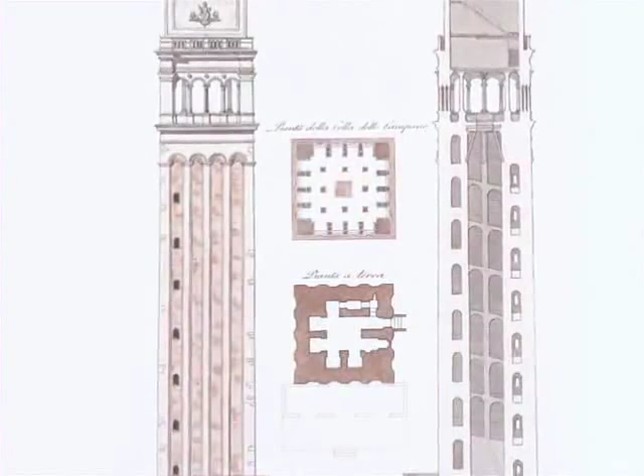And while the MetLife Tower's form was modeled on the Campanile in San Marco, the two structures couldn't be more different. The Campanile's impressive height, 323 feet, was achieved through the use of massive brick walls, over 12 feet thick. So thick, in fact, that they leave just a 12-foot square area of usable space inside the tower.

The MetLife Tower, on the other hand, uses an innovative steel frame to achieve its record-breaking height of 700 feet while providing over 200,000 square feet of interior commercial floor space. The exterior walls of the MetLife Tower are just a thin limestone veneer.

The difference between the Campanile of San Marco and the MetLife Tower can be summarized in one word: steel. The unique properties of steel enabled the MetLife Tower's great height and its efficient use of interior space. This is a typical example of the influence of materials on the form, function, and structure of a great building.

In many respects, steel is an ideal engineering material. And so I'm starting today's lecture with this particular material because it serves very nicely as a benchmark for comparison with all of the other materials that we'll be talking about later in the lecture.

And in comparison with those materials, iron, concrete, wood, stone, and brick, steel really is superior in terms of all three of those principal mechanical properties: strength, ductility, and stiffness that I talked about last lecture. Let's use the stress-strain curve for a typical structural steel to review these properties.

The most important mechanical property of any material is strength. It's the largest stress a material can withstand without failing. To be precise, the overall height of the stress-strain curve, as shown here, is called the ultimate strength. For this particular structural steel, the ultimate strength is about 65,000 pounds per square inch, significantly higher than the other materials we'll be comparing steel with shortly.

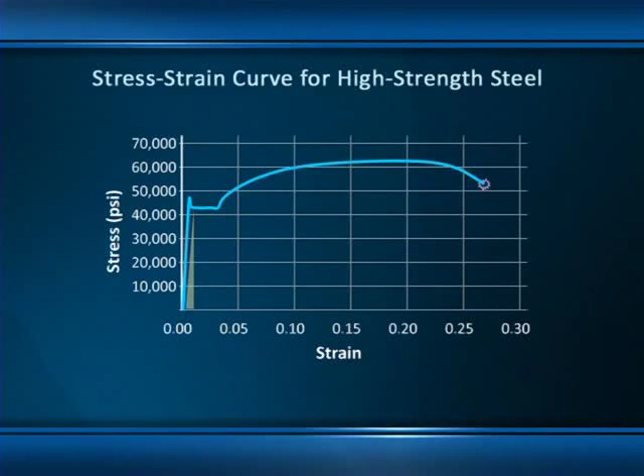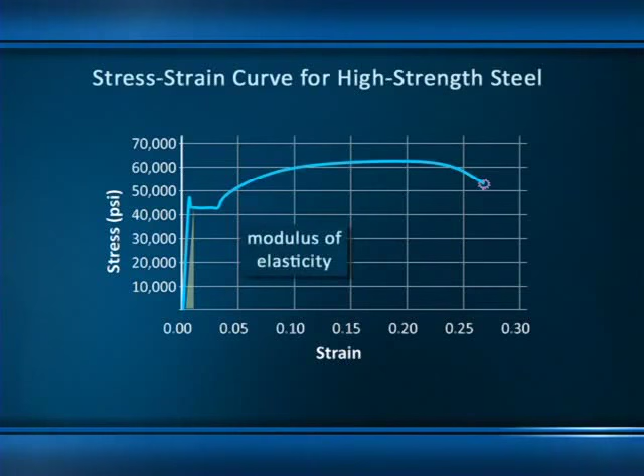Stiffness, the third of our important material properties, is the material's capacity to resist elastic deformation, represented by the slope of the elastic portion of the stress-strain curve. The slope of a line is defined mathematically as the rise divided by the run. When we calculate this number for a stress-strain curve, we get an important material property called the modulus of elasticity. A stiff material has a high modulus of elasticity. We'll see some really important applications of this property when we discuss columns in Lecture 5.

Stiffness is also a good thing. Stiffer materials deform less under a given load, and so they're particularly useful for structural applications where deformation is a concern. Skyscrapers, like the MetLife Tower, for example, are particularly susceptible to lateral sway caused by wind loads.

Steel provides the stiffness necessary to control this sort of deformation. While steel exhibits the ideal qualities of strength, ductility, and stiffness, it's not an ideal material in all respects. In fact, steel has several important major limitations as a structural material.

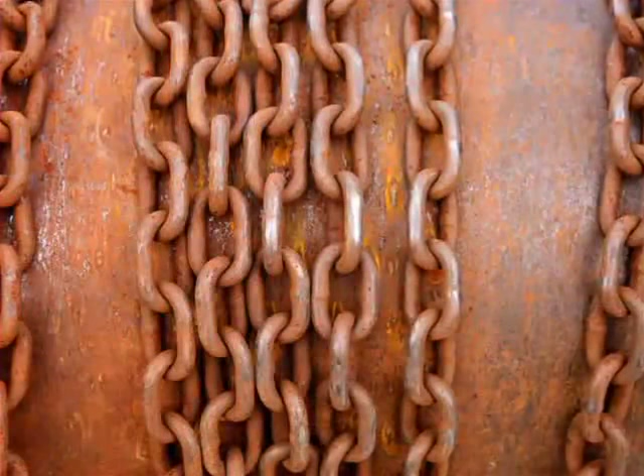First, it's susceptible to corrosion, the long-term deterioration caused by the chemical reaction between iron and oxygen. You probably know this phenomenon as rusting. It also has very poor fire resistance. By the time steel reaches 900 degrees Fahrenheit, it will have lost about 30% of its tensile strength. By 1400 degrees, it will have lost nearly 90% of its strength.

That's steel. Now let's examine some of these other common materials, wood, masonry, concrete, and iron, and see how they've been used in great structures through the ages in a manner consistent with their material properties. First, wood. Wood has been used extensively throughout history, including prehistoric times, because it's available in most regions of the world and because it can be worked quite easily with simple tools.

Wood is the lightest of the common structural materials, and we can see that very evidently with a very simple demonstration. These two small structural members are exactly the same size. Their dimensions are identical, their lengths are identical, their widths and their thicknesses are identical. So what's their difference in weight? Well, we know the steel is heavier, but how much heavier do you think it is? Twice as heavy? 3 times as heavy?

Let's see. When we place this steel bar on our scale, we see that it reads about 0.6 pounds. Now let's try the wood. When I place the wood member, which is identical in size, on the same scale, look carefully, because what you'll see is the scale hardly registers any weight whatsoever. It's less than 1/10 of a pound, and therefore about 1/10 of the density of steel.

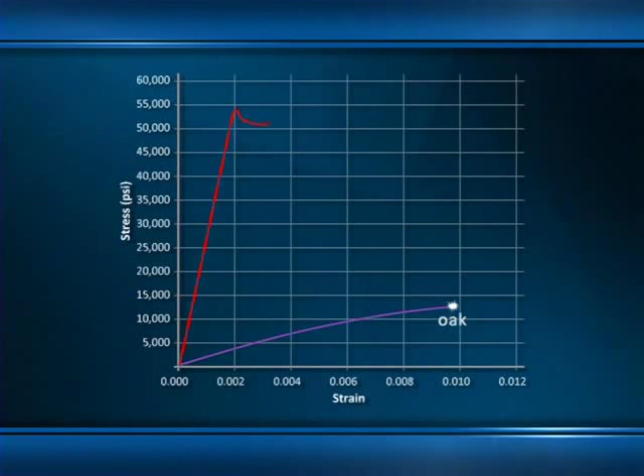Now, if we compare typical stress-strain curves for wood and steel, we see that a typical type of wood, oak, is only about 1/4 the strength of structural steel. And since it's only 1/10 the weight of steel, the strength-to-weight ratio, which is a very good measure of structural efficiency, is actually a lot higher than that of steel. And that certainly explains the fact that wood, while we think of it as a sort of a primitive structural material, is actually still very commonly used today.

Wood is also much less stiff than steel, as you can see from the shallower slope of oak's stress-strain curve. We can also see it in a very simple demonstration using those same two elements. If I now use each of these two elements as a beam, I can place them spanning between the two bricks. And if I place a load on each of these beams at midspan, watch carefully and you'll see that under the action of this load, the beam bends about 1/10 of an inch. That's a pretty good reflection of the stiffness of steel, its capacity for resisting elastic deformation.

Now, if I do exactly the same test on the wooden member, which again has identical dimensions, we find that those flexural deformations, the bending deformations, are in excess of 2 inches, more than 20 times larger than the deformations that we saw in steel. So clearly there is a vast difference between the stiffness of these two materials as well.

Now, as we're looking at these stress-strain curves, notice that for clarity, I've cut off most of the right-hand end of the steel stress-strain curve. Recall that the failure strain for steel is about 0.25, 25%. So if I ran the horizontal axis of this graph all the way out to 0.25, the curve for oak would be squashed so tightly against the left-hand side that you wouldn't even be able to see it. This tells us that wood is a relatively brittle material. Its failure strain is quite small in comparison. Steel is about 25 times more ductile.

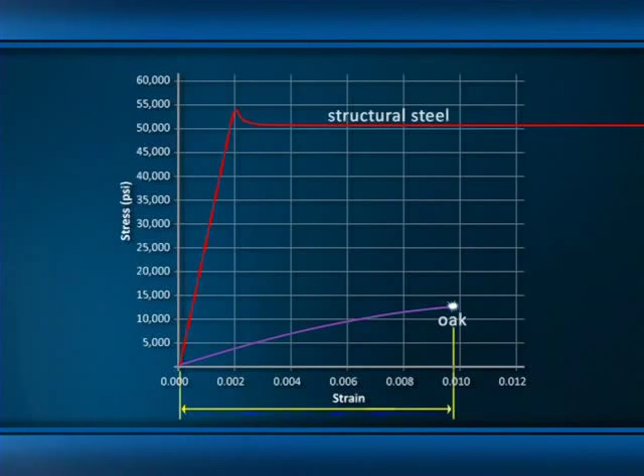Like steel, wood has roughly equal strengths in tension and compression, a very desirable quality. And this, in fact, was unique among the materials available to ancient and medieval builders. Stone and brick masonry, as well as concrete, all have very low strength in tension, even though they have relatively high strength in compression. Recall that beams and trusses both require materials capable of carrying both tension and compression. And so virtually all of the long span beams and trusses that we know of from the ancient and medieval worlds were made of wood.

Here are some fine examples of early medieval wooden roof trusses spanning the nave of this beautiful little Romanesque basilica in Florence, Italy, San Miniato al Monte. We'll be looking more closely at this incredible structure in a later lecture.

Another important attribute of wood is its natural beauty, which accounts for its continued use in modern buildings like St. Maximilian Kolbe Church in Westlake, California, shown here. Wood also has several disadvantages as an engineering material. In addition to its brittleness and low stiffness, which we've already seen, wood is also subject to rot.

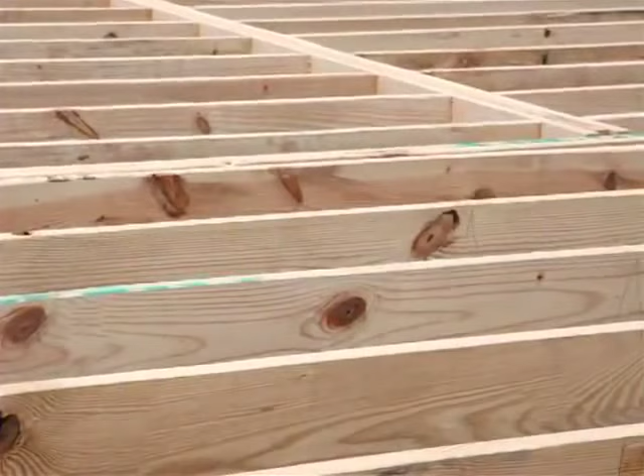It's highly flammable, and because it's a natural material, its mechanical properties are much more variable than, say, iron or steel. We've all seen knot holes in wood, and a knot hole represents a point of weakness. That's a significant challenge for structural designers trying to plan for the use of material in engineered systems.

And finally, it's important to remember that wood is an exhaustible natural resource. Back in the ancient world, timber was in very high demand for shipbuilding and construction and heating and charcoal, which was used for smelting metals. As a result, most of Greece, for example, had been almost completely deforested by the 5th century BC. This was an environmental tragedy, and it really persists even to this day.

But it did produce one interesting and positive outcome. The shortage of timber almost certainly contributed to the increased use of masonry construction in ancient Greece, and therefore is part of the reason why we have these more enduring architectural features and architectural wonders that have come down to us from Greece's golden age.

Okay, let's move on to the next type of engineering material, stone and brick masonry. It's another family of construction materials dating from prehistoric times and still in wide use today. Back in the ancient world, masonry construction was very heavily influenced by geography.

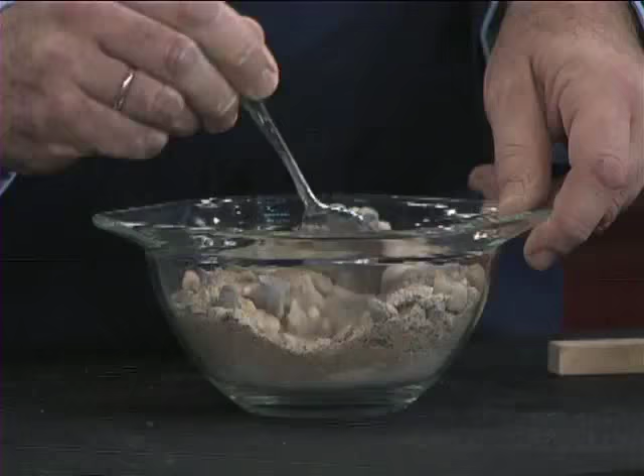And before I actually mix everything together, I need to first pre-mix the dry components so that they're well blended together. And this is really important because of the way concrete actually works as a structural material. I add water carefully to get just the right amount. When we add water to the mix, it blends with the cement, and it actually forms a paste. And that paste will ultimately harden as a result of a complex chemical reaction.

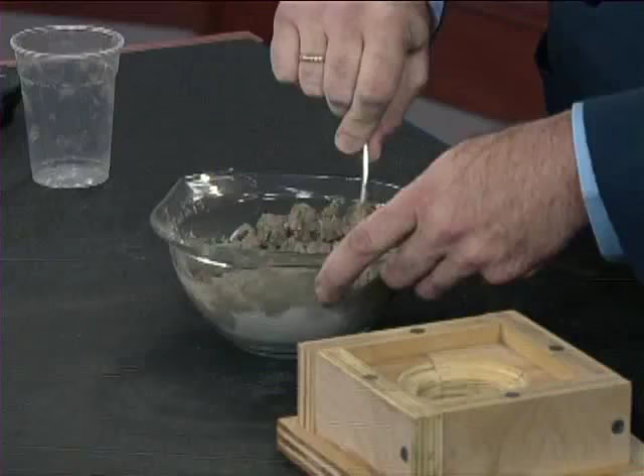What happens to the paste is that it fills in the spaces between the granular aggregate. Between the grains of sand and the pieces of gravel, there are very small open spaces, voids. The cement paste fills those voids, and as a result, gives concrete the capacity to harden into a very solid mass when it's completely cured. And that solid mass is what makes it so effective as a structural material. It really turns it into, effectively, a man-made stone.

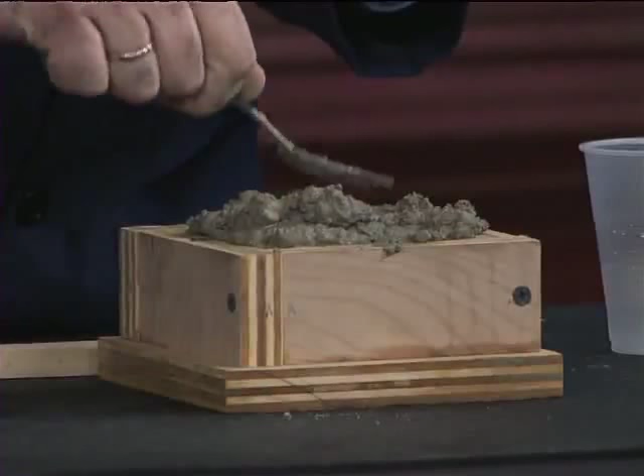Okay, so now we have our concrete mix in place. We're going to add it to a form, and this is the way modern concrete construction is normally done. A temporary form is prepared, which contains the concrete while it's still in liquid or semi-liquid form, and that set of forms then is responsible for creating the final form of the concrete structure. When we put the concrete into the mold or temporary formwork, I need to consolidate it.

And then once we're done with that process, I use what concrete constructors call a screed. That's just a piece of wood that allows me to strike off the excess material from the top of the mold and consolidate it so that we now have a nice flat surface of concrete on the top of our mold, and our concrete construction exercise is now complete.

Now, concrete sets up in a few hours, but it actually takes several weeks to reach its full strength. Fortunately, it would be strong enough so that next lecture, when we talk about columns, we'll be able to use this. And in fact, what will eventually emerge from these forms is a capital of Trajan's column. Stay tuned and see how it turns out.

In ancient Roman concrete, the cement was a mixture of lime and a volcanic ash called pozzolana, named after the village of Pozzuoli near Mount Vesuvius, where the material was first obtained. Pozzolana produced a very strong, durable concrete that was even capable of hardening underwater. The aggregates typically were rubble, stone, broken bricks, or pieces of clay tile.

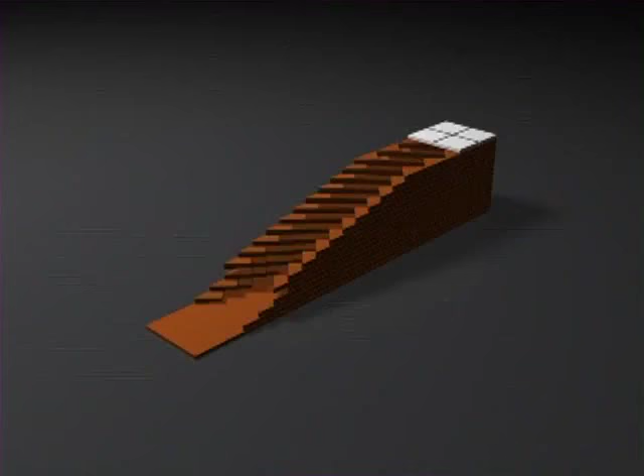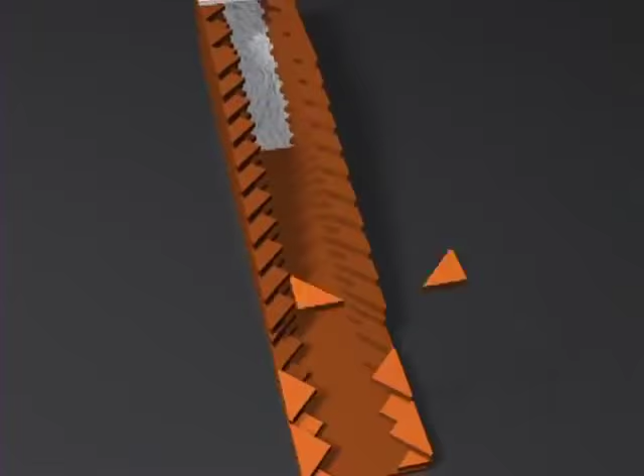But the Roman system, which was called opus latericium, is fundamentally different, and in some ways it's actually superior to modern methods. In opus latericium, which is illustrated here, bricks, often triangular in shape, were used to form the outer surfaces of the wall, and then the space between those bricks was filled with concrete, which actually provided the wall's structural strength. The brick facing eliminated the need for any temporary formwork, and then it gave the finished wall a much more pleasing finished appearance.

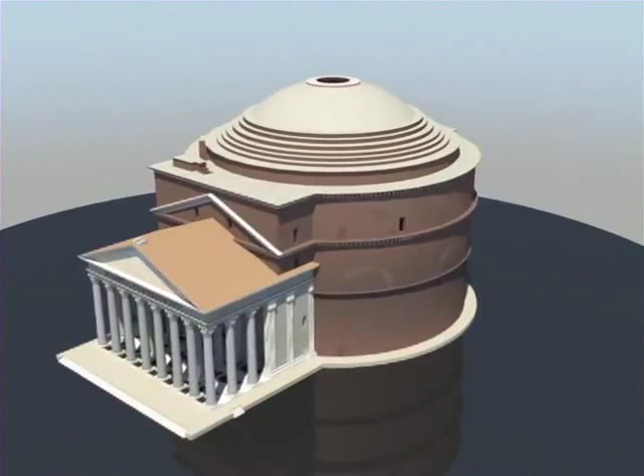By standardizing these sorts of building systems, the Romans were able to design and build an amazing variety of concrete structures all over the empire. The greatest of these was certainly the Pantheon, this incredible monument, not just to Roman engineering, but to Roman expertise in concrete construction. We'll be examining this extraordinary building in Lecture 13 in much more detail.

Modern concrete now uses something called Portland cement. It's a manufactured product that's chemically somewhat different from Roman pozzolana, but it works in essentially the same way. The first process for manufacturing modern cement was developed and patented in 1824 by a man named Joseph Aspdin, a British mason. Aspdin called his product Portland cement, not because it was made in Portland, but rather because the cured concrete resembled a popular type of natural building stone that was found on the Isle of Portland.

So when you buy a sack of Portland cement today at your local hardware store, you're actually experiencing a nearly 200-year-old marketing campaign that succeeded beyond Joseph Aspdin's wildest dreams.

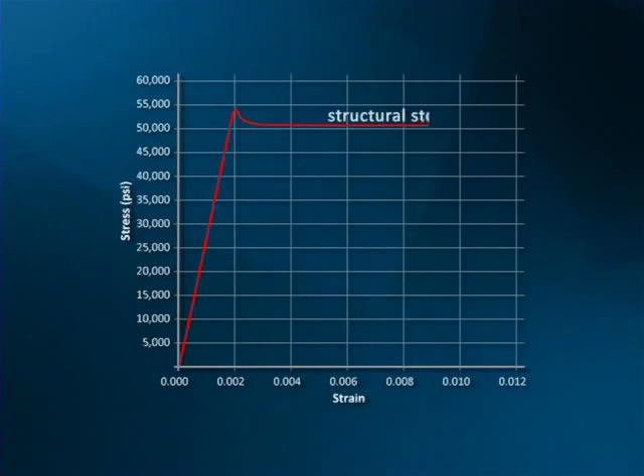Now let's explore the mechanical properties of concrete. Note that unlike the curves for steel and wood, the stress-strain curve for concrete is based on a compression test rather than a tension test. Concrete fails at such a low amount of load in tension, about 500 psi, that the tensile stress-strain curve for the material wouldn't even show up on this graph. It would be so low.

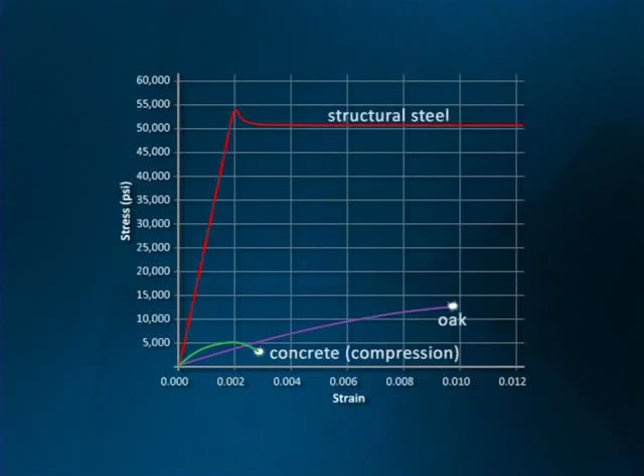But even in compression, concrete isn't nearly as strong as steel. In practice, however, because it's so inexpensive, we can generally get very high compressive strength in a member by simply using a much larger cross-sectional area than we would with steel. Concrete has very good fire resistance, and reasonably good weather resistance as well. But as you can see from the diagram, it's also quite brittle. Perhaps concrete's most important weakness is its poor tensile strength.

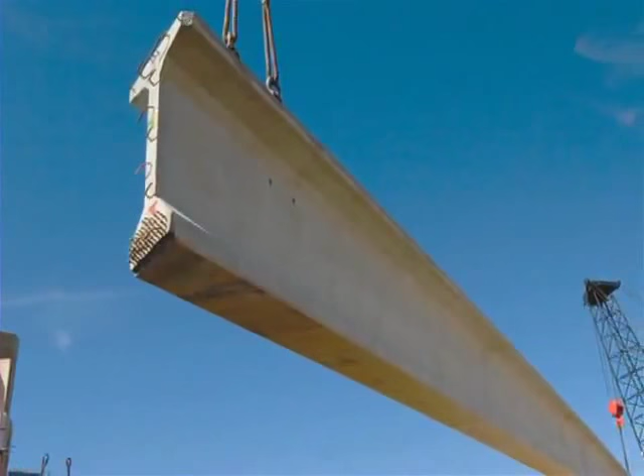In modern times, this limitation has been largely offset by the use of steel reinforcement. To give you some sense of the benefit gained from steel, a typical reinforced concrete beam is more than 10 times stronger in flexure than an unreinforced concrete beam with the same dimensions, and its ductility is more than 50 times greater. Reinforced concrete is so fundamentally different from plain concrete that it's really best to think of reinforced concrete as a different engineering material entirely.

Its development is a fascinating story, but understanding it actually requires a few more engineering mechanics concepts that we haven't covered yet, so we'll discuss modern reinforced concrete structures later on in the course.

Without question, concrete's greatest advantage over other construction materials is its versatility of form. From the ancient dome of the Pantheon to the concrete spiral of Frank Lloyd Wright's Guggenheim Museum in New York City, concrete allows us to create structures of virtually any shape. As my friend Rick the Concrete Guy says, if you can build the formwork, I can fill it with concrete.

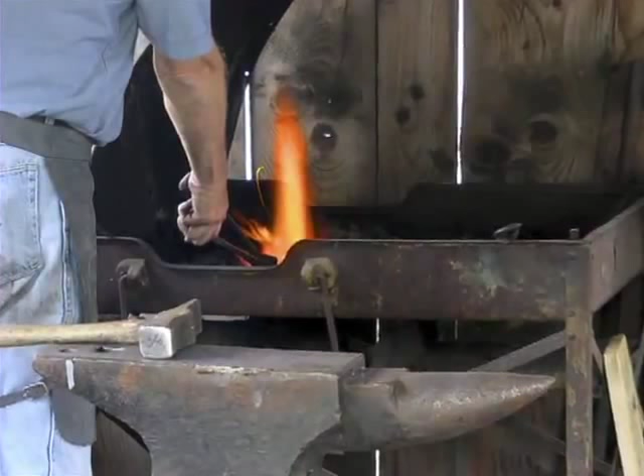On to iron. Iron has been produced by human civilizations for roughly 4,000 years. As a structural material, it's used in two different forms: wrought iron and cast iron. What's the difference? In general terms, wrought iron is made by heating iron ore in a furnace until it's extremely hot, but not hot enough to melt. This process is called smelting, and it produces a lump of hot iron called a bloom, which is then beaten with a hammer or flattened with heavy rollers to remove impurities and increase ductility.

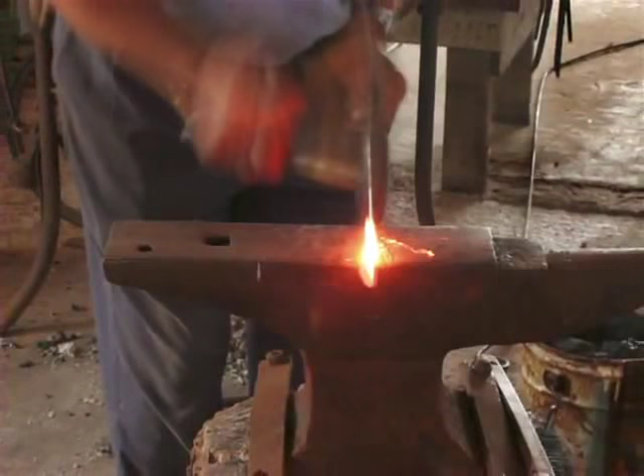The earliest form of wrought iron was probably produced by the ancient Hittites in the 2nd millennium BC. In ancient Greece, builders used small iron connectors to strengthen stonework, but the material was really never available in sufficient quantities for complete structural elements like beams or columns. By the 2nd century AD, though, the Chinese were using wrought iron for suspension bridge chains.

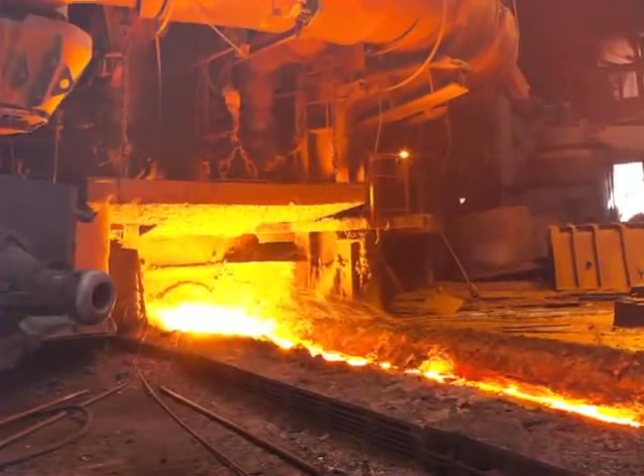Cast iron is created by heating iron ore until it does become liquid, and then pouring it into a mold, very much the same way that I poured concrete into a mold a few minutes ago. The finished product also includes a significant amount of carbon, roughly 2 to 4%, which is the material that actually contributes to both the compressive strength and the brittleness of cast iron.

Cast iron was probably developed in China in the 6th century BC, but it didn't really appear in Europe until about the 14th century. In the 14th and 15th centuries, European technology for making iron advanced rapidly in response to the need for improved cannons and other military hardware. By 1779, the Industrial Revolution was in full swing, and the resulting advances in iron-making technology were reflected in this great structure, the world's first all-iron structure, the Iron Bridge at Coalbrookdale, which is in fact the ancestor of many great structures from the Eiffel Tower to modern skyscrapers.

Adding both wrought and cast iron to our collection of stress-strain curves, we can see that wrought iron has essentially the same properties as steel. It's relatively strong, not quite as strong as steel, but still quite strong. It's stiff and it is ductile. Cast iron, on the other hand, is quite brittle and relatively weak in tension.

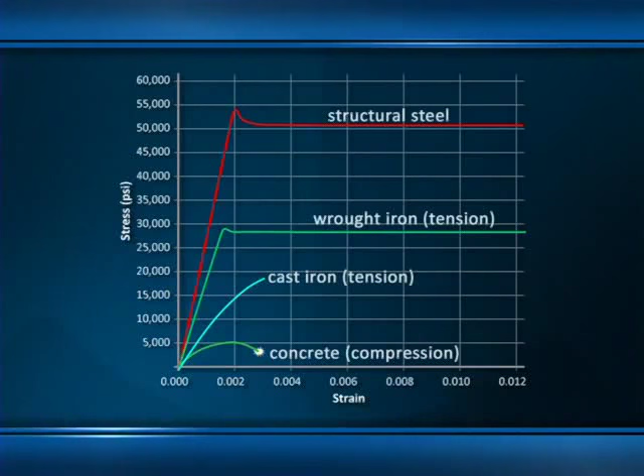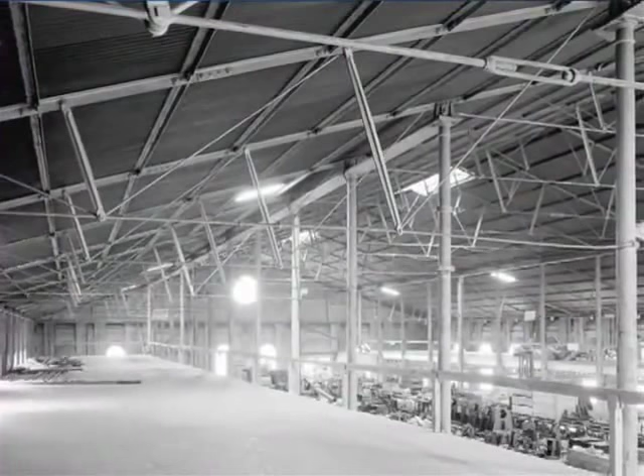For these reasons, we often see 19th century structures made of both cast and wrought iron: cast iron for the compression members and wrought iron for the tension members. We'll see this sort of tailored use of iron structural components in Lecture 7 when we examine the roof trusses of this building, the oldest all-iron building in the United States, located at Watervliet Arsenal in upstate New York.

Iron reigns supreme as a structural material until 1856, when the development of the Bessemer process made the mass production of high-quality steel possible. Steel is an alloy, a mixture of iron and carbon plus small amounts of other elements like manganese and chromium. In very general terms, steel has more carbon than wrought iron, but less than cast iron, just enough to add strength without compromising ductility. Steel was used initially for railroad rails, but eventually found its way into construction starting around 1870.

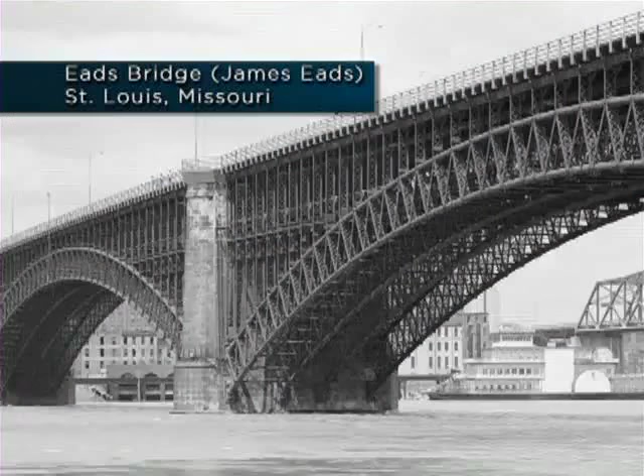And when James Eads decided to use steel for the monumental arches of his bridge over the Mississippi River in 1874, it was considered to be a very risky decision. We've come a long way since then, and today steel is the material of choice for the world's longest bridges. Steel's dominance of tall building construction is being challenged today, though, by the new kid on the block, high-strength concrete.

In 1998, the concrete Petronas Towers in Kuala Lumpur, Malaysia, surpassed the steel Sears Tower in Chicago to become the world's tallest building, the very first time ever for a concrete structure. Yet this structure still depends heavily on steel reinforcement for its load-carrying capacity. This interplay between steel and concrete exemplifies the critically important role that materials play in the engineering design process.

Engineering materials will be with us for every remaining lecture in this course. Next lecture, we'll resume our exploration of the 6 basic types of structural elements with the column. And when we do, we'll see that the material properties of strength and stiffness have a profound influence over this structural member's performance as well.